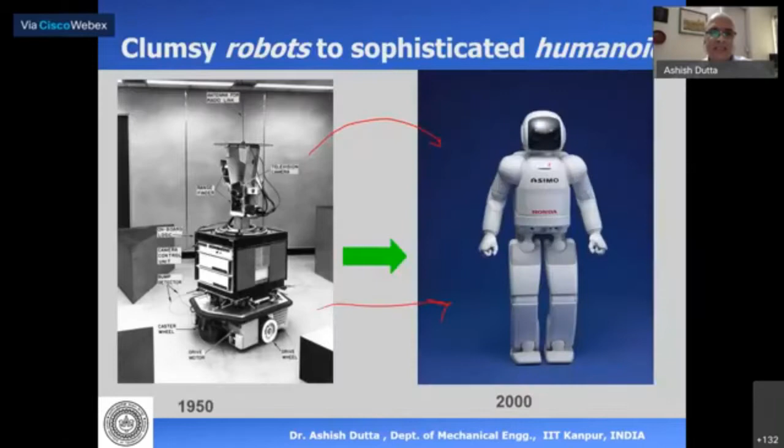As we go along, with the transistor, 1949 came about the microcontroller and the computer. The early computers were very big, probably the size of a room if not bigger. They consumed kilowatts of power and were made up of vacuum tubes, diodes, triodes and whatnot. So they were so expensive and so big that they could not be used widely.

But as we progressed after the invention of the transistor, things became smaller. The computer became smaller and more powerful. So in the earlier days, we had one computer controlling one machine - this is about the 1960s. In the 1970s, the computer becomes more powerful and we have one computer controlling many machines.

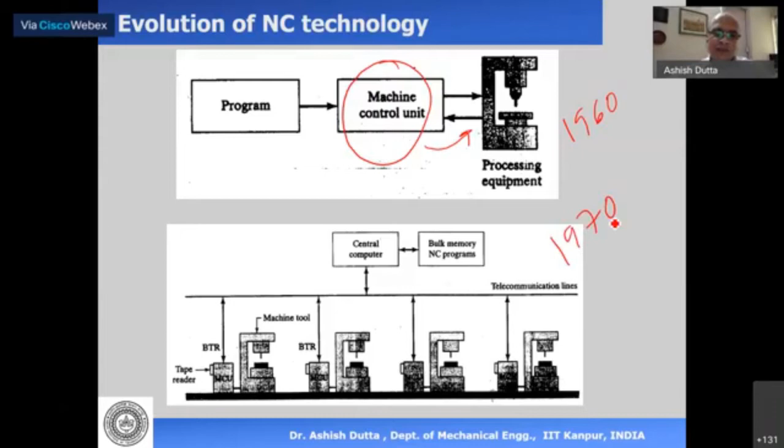Then we proceed further. The computer becomes so powerful that it can control all other aspects of manufacturing - for example material handling, storage - and this is what we call computer integrated manufacturing, which basically means the computer has become smaller and more powerful.

Today we know that the computer sitting inside your mobile phone is probably more powerful than the mainframe computers which were there in the 1960s. That is the way it has progressed. But what resulted in this progress? That is something I'm trying to point out.

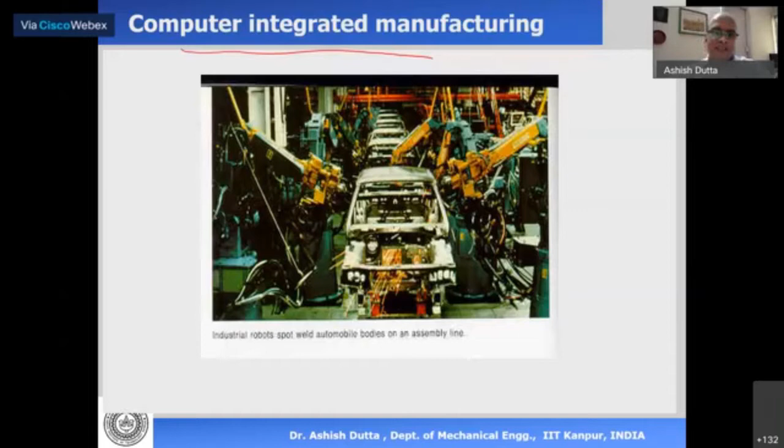So the second thing - before we go further, we talked about a robot. What is the definition of a robot? Now nobody seems to agree. That's interesting - why? Because all the companies want to call their device a robot.

In terms of students, if you ask a student what you're making, he'll say, I'm making a robot - why, it sounds nice. So people want to use the word robot freely for good impact, right from industries to students to academics to everywhere. That's why nobody seems to agree on what a robot actually is.

But it's generally agreed that to be called a robot, a device must do some or all of three things. The first is it should move around - if a mobile robot moves around, we can say this thing is a robot. By that definition, a vacuum cleaner today that can clean by itself is a robot.

Eureka Forbes sells vacuum cleaners which can clean your room by themselves - that is the definition of a robot. That is a robot. So that's the first point.

Second point is it should sense and manipulate the environment - it should have some kind of sensor input and output. We saw the mobile robot sense if there's an obstacle in front and take corrective action. So it can sense the environment and manipulate it.

This is the second thing it should be able to do. And the third thing it should be able to do is display some kind of intelligent behavior. So if a machine can do either of these three or all of them, you can call it a robot - that's what people agree today, that to be called a robot, a toy or machine should be able to do some or all of this.

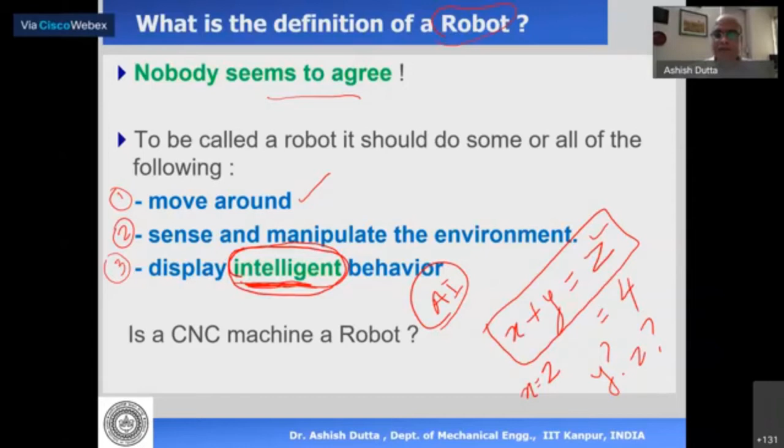So intelligence basically means the ability to deal with information that will require some kind of thinking. This is talking in English - what does it mean mathematically? That's not part of this lecture, but it has something to do with AI, maybe it can be discussed elsewhere. But this is important: if a machine can do any of these three things, we can say it is intelligent - it is a robot.

Based on this, we have had three generations of robots. The first generation has very simple pick and place. The second generation has external sensors, and the third generation are intelligent in some way.

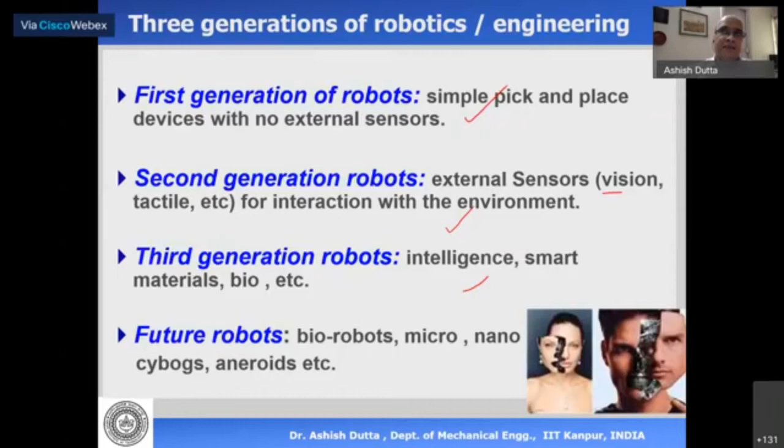Now the second major revolution came about in 1970, when electronics became faster, smaller, and cheaper. The computer, which was so big and expensive, suddenly became cheaper and smaller, and it has become so cheap today that it can sit inside your mobile phone. Why did this happen? The invention in electronics was VLSI.

VLSI is very large scale integrated circuits. Because of this, you could make the diode and triode into small electronic devices like transistors and chips, and put them in a motherboard. So if you look at your mobile phone, your computer, your laptop, it is essentially a board with small chips on it. What enabled that is VLSI, and once we had VLSI, electronics became smaller, faster, and cheaper, and our lives changed drastically.

The camera in a mobile phone is so small, so cheap, and so fast that it was not there maybe 20 or 30 years ago. And you can see it going faster and faster. Similarly, processors, displays - the essential technology is VLSI.

So robotics started off with the invention of the transistor. Then electronics became smaller, faster, cheaper in the 1970s. From the 1970s we had different subjects like vision, computer vision, speech recognition, artificial intelligence, and advanced controllers - microcontrollers, DSPs, FPGAs - which are used in mobile phones today. Essentially it came from here.

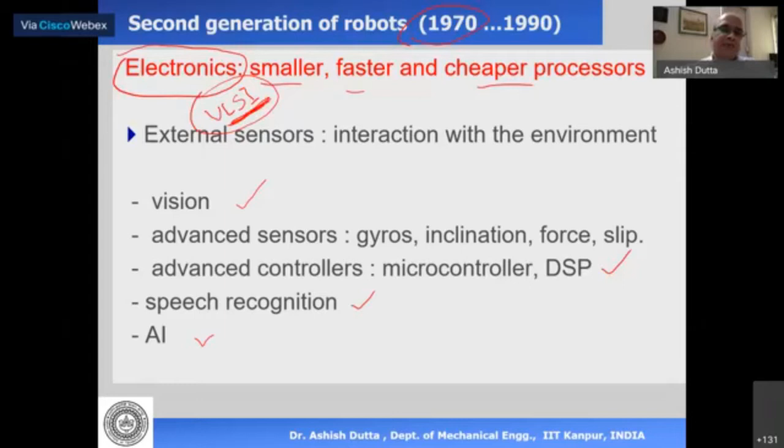Now, the third great invention that came about was new materials - smart materials, smart actuators, smart sensors. This is the third invention that came about, which we call the third generation.

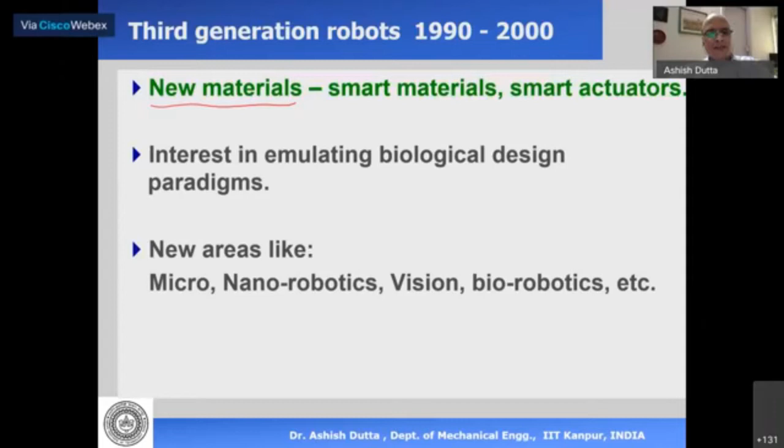So this is essentially to give you the history of where it came from and where it is going. Now robots can be of different types - they can be parallel robots, mobile robots, or stationary robots.

Now these are everywhere - you see them on TV. News will have something about a drone, some weapon used by a drone, mobile robots delivering something, pizza being delivered by a drone today. So this is a part of our lives.

Now, industrial robots, social robots - these are some ways by which robots are classified. What is the future? The future holds so many possibilities.

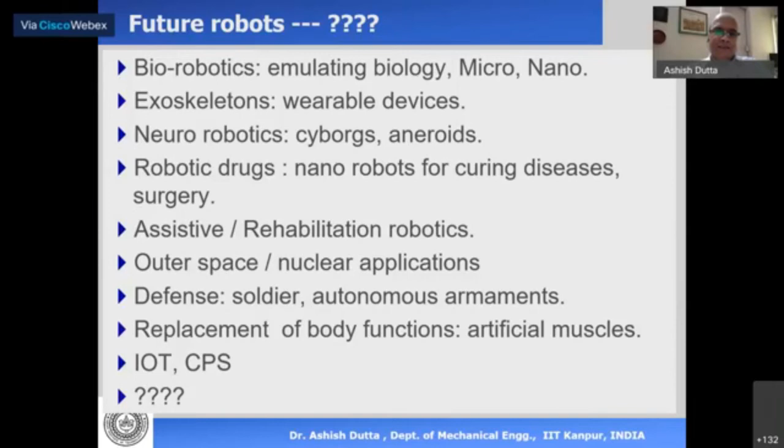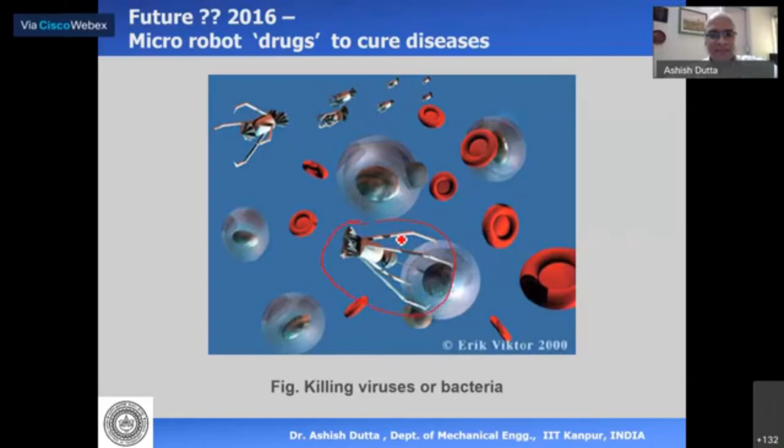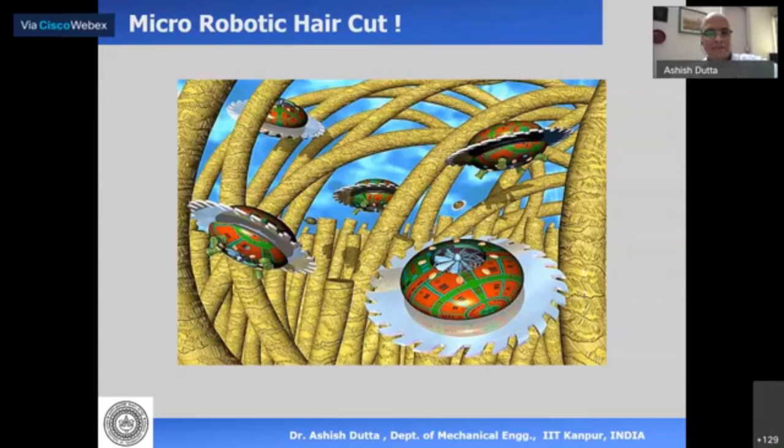Let's move on. This is for rehabilitation robotics, for people who have reduced muscular power or suffer from paralysis, or are disabled. Robots can be used to enhance their walking or carrying ability. Such robots are called exoskeletons, and they're already on the market for disabled people.

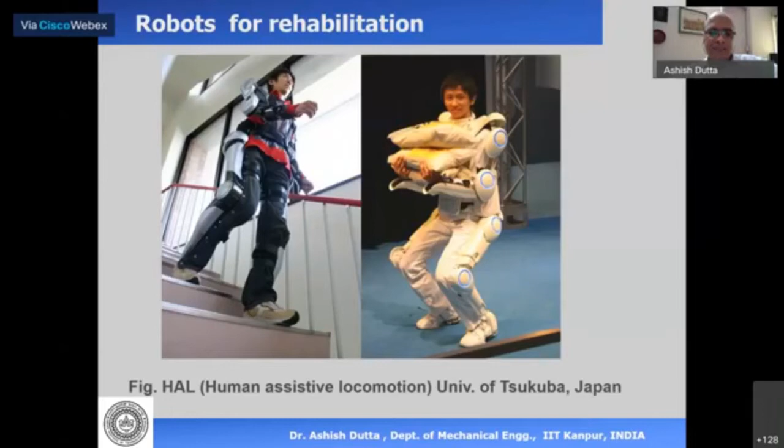Defense is a very big application of this. Soldiers need to carry a lot of weight, so defense is a big user of this technology.

Rehabilitation after stroke, I spoke about it some time back - these are basically robots for teaching how to walk. A person who has lost the ability to walk needs training, so the person is trained on this kind of robot. This is called the Lokomat. It is there in India also, in several cities they use this, although it's very expensive.

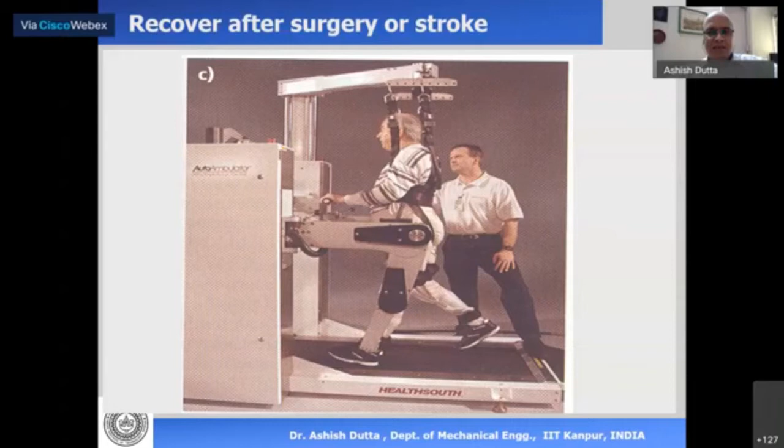Automatic transport is already there in so many countries. There are automatic buses which do not have drivers. They go and stop in some place, and people get up and get down. Although I doubt whether they'll work in Indian cities, they are there around the world.

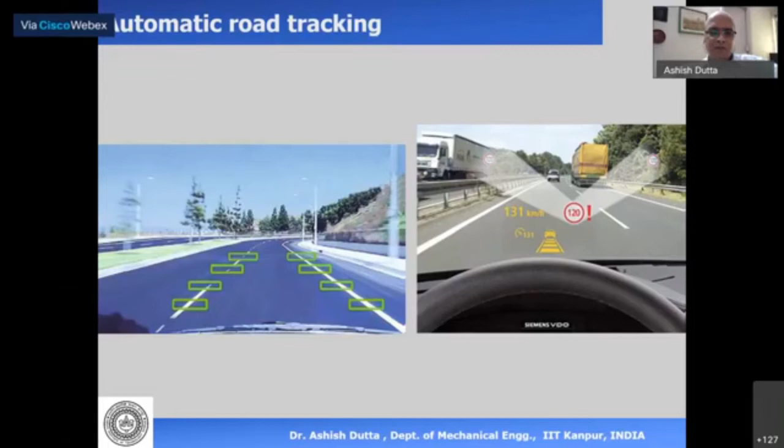Brain-computer interfaces again, this is something which is very much of interest now. One is automatic drivers, then driver tracking - a lot of car companies are already doing this, where if the driver is sleepy or looking at the mobile phone, it can give an alarm. So face tracking, road tracking, then rehabilitation robots which are interacting with humans.

Now coming to education, we said that robotics has become very cheap, because of which it has proliferated right down to the school level. Now there are different robotic platforms available, and what I want to give you an introduction to is that it's very, very simple, and it enhances a lot of other subjects. It is not only for technical people and people in sciences, it is for everybody. So one of them are mobile robotic platforms.

The other is serial arms, robotic arms. Now, how do these robots actually work? If you think a little bit, how do you drive a car? When you drive, you look at the road, you want to follow the line on the road or keep to the left. Basically, you look outside, you hold the steering wheel, you turn left or right, and the car goes forward. That is how you drive a car, and basically we call that a closed-loop control system.

A basic control system essentially consists of the driver, which is you. There is a steering in front, and there is some feedback. Where is this feedback coming from? When you're looking outside with your eyes and rotating the steering, the automobile is moving, and there is feedback - this feedback is vision. So we are looking with our eyes, seeing where the road is, and tracking it. These are four parts which are basically involved in any robotic system.

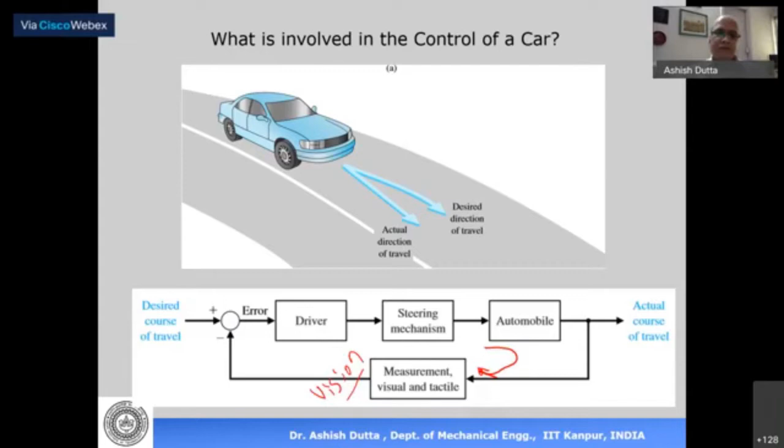This is an example of an educational robotic system, a mobile robot which has sensors in front, and it can perform particular tasks. It basically consists of an actuator, a DC motor which is going to move. Then we have a sensor, which is going to sense something. Then we have power, which is a battery - you need to give it power. There's a controller module. So essentially we have a DC motor, a battery giving power, a controller, and we can have a sensor. We need not have a sensor, but we can have one. These four things make up the robot.

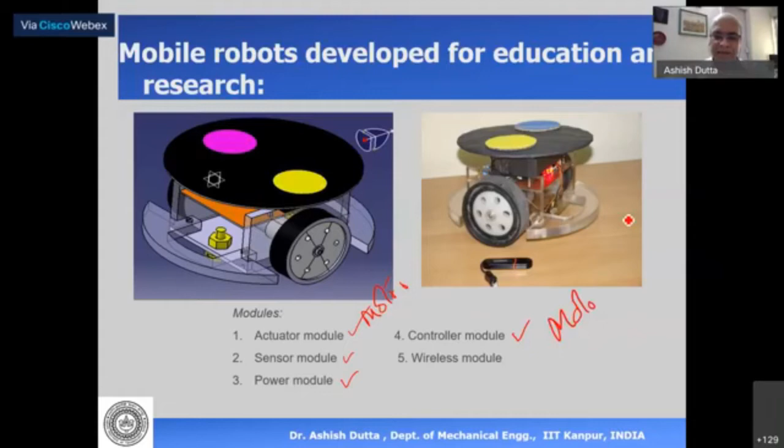So number one is a motor - we have a motor here. Then we have a controller, which is here. Then we have a battery, which is here, and some kind of sensor, so there can be a sensor somewhere here, at the bottom. By controlling and adding these things, we can make a robot.

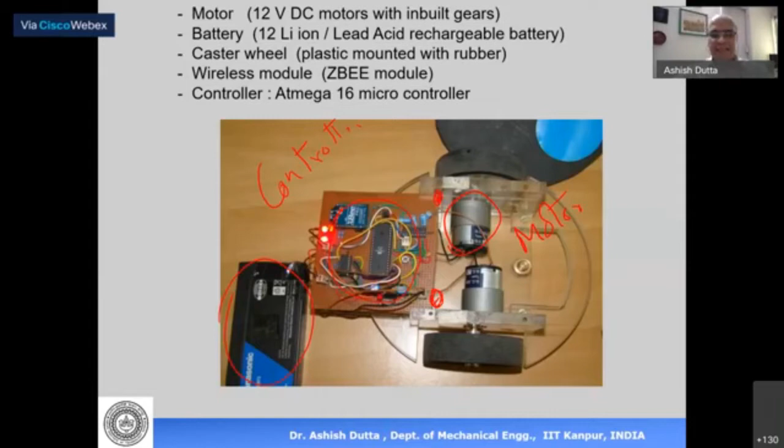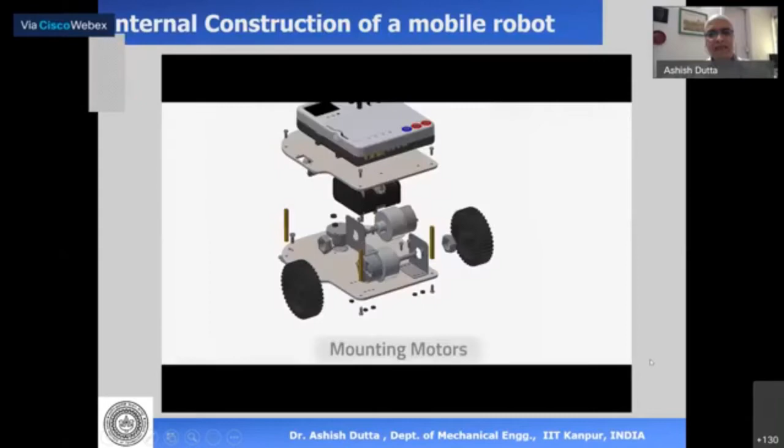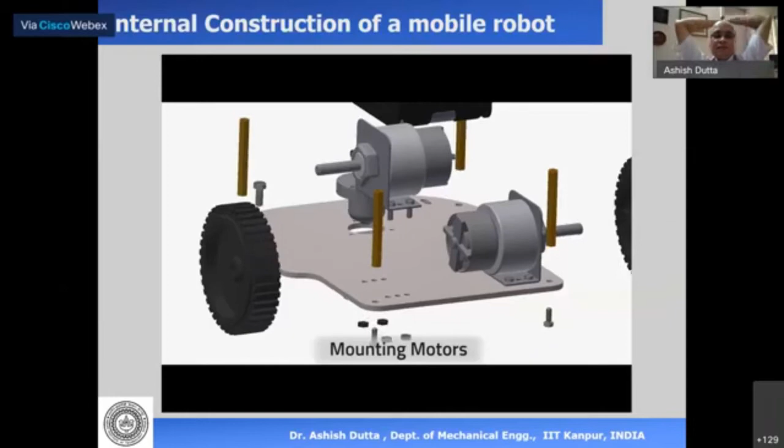Now, how easy is it to make it? This video actually explains how easy it is. So these are the different parts - you just connect the motors, and to the motors we can connect the wheels. So the two motors drive the two wheels, and the wheels are connected to the motors.

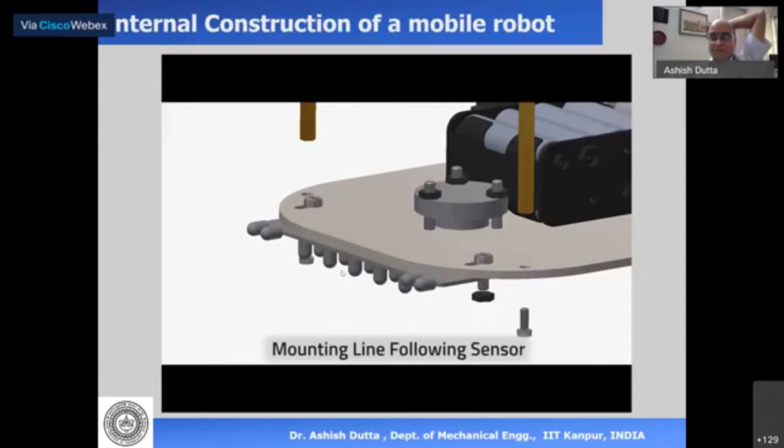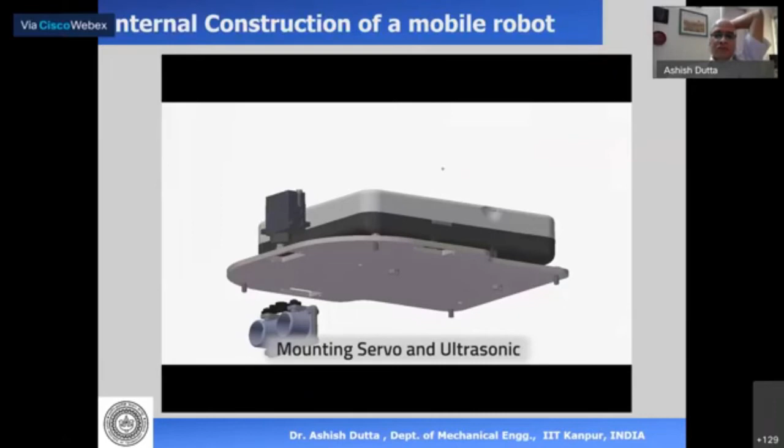Then there is a battery. There are sensors - in this case, ultrasonic sensors in the front, and IR infrared sensors at the bottom to, for example, follow the line. This one here is an ultrasonic sensor, and there is a controller on top - so this is the controller. So there are 4 units. You put them together, and this is your robot.

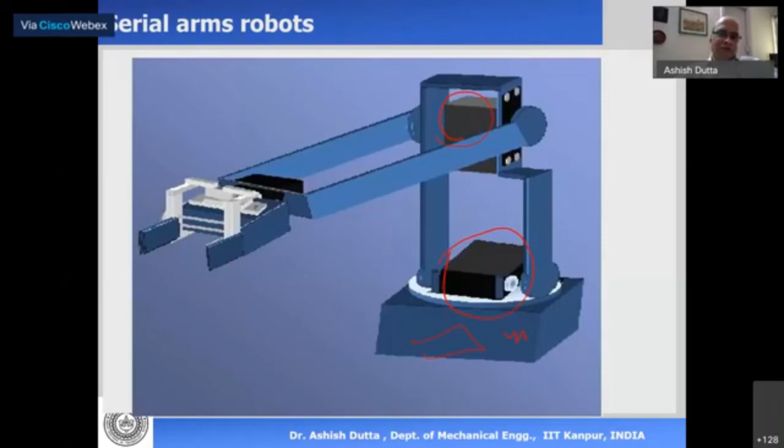So you can very well see how easy it is to make a mobile robot and to make a serial arm robot, okay, for students. These are not industrial, these are just for teaching. But this, because first of all, the controller has become very, very cheap.

Now, if you're wondering where you've used it indirectly, most washing machines and microwaves all have controllers, and a lot of them are these Atmega controllers. So sitting everywhere in your house also, you don't know they're there. In cars, the automatic backing sensors are ultrasonic sensors - so the sensor is there. Automatic transmission, automatic fuel injection is done by an electronic system today, which is again controlled by a microcontroller. So this is sitting in your car also. It is there everywhere.

We don't see it. Now, this is essentially the microcontroller, and this microcontroller can be used very, very simply to control a DC motor or to take sensor input output. It is so simple that you'll be surprised it can be done so simply.

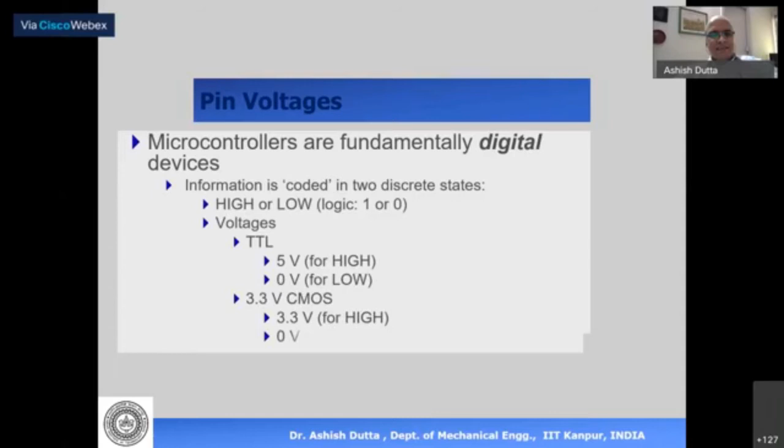That's it. Now, how do you write it in terms of a program? How we write it is basically - this is the basic command line, okay, nothing to get scared about. So it's the pin mode, pin number, and pin mode - this is actually the syntax for the program line. The pin mode says you have to set the pin to either input or output, so the pin can do either. So you have to first tell what is the pin number and what is the mode - is it input or output?

Okay, then you can do a digital read if you're reading something from a pin. It is very logical - first you tell the microcontroller that the pin is an output pin or an input pin. Second, after you have said that, if it's a read pin, that means you're reading sensory information from the sensor, then you can read it as a read pin. It is going to read pin number.

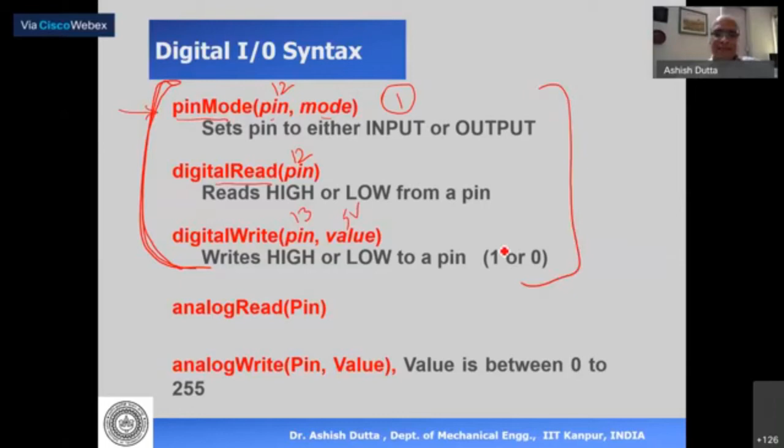Suppose pin number was 12 here. We can write pin number 12, and it says it will read whatever signal is coming on pin number 12. Digital write: if you're sending a voltage out, you simply say it's a digital write, and what value, so 5 volts goes out on pin number 13. So just these three commands are enough to drive a robot. You'll be surprised how easy it is. Just these three are enough for a very, very simple kind of robot programming.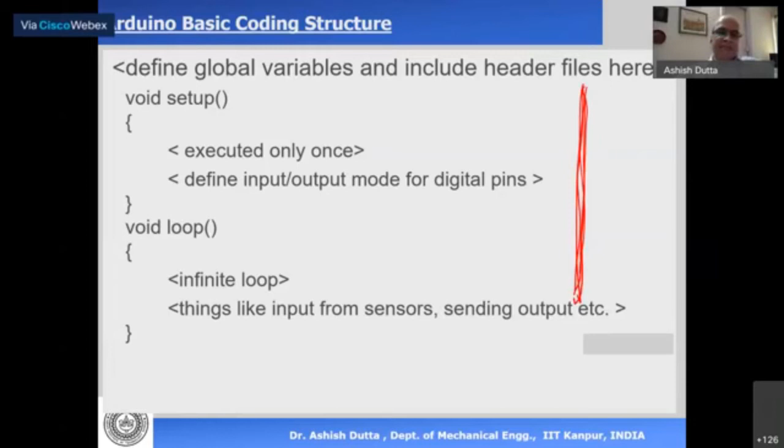Now there are other files which run the microcontroller itself. Those program lines are actually available in open source, and this is the same everywhere for the microcontroller. So you just have to copy it and paste it.

So if you want to blink a light, for example, there is an LED, which is this one. It's not a white light, it's a red light. Like the Diwali lights that keep blinking, that's another example, a very small chip controlling your Diwali light which is blinking. So that's a chip, something we have in our houses. So if you want to blink this light, what is the program associated with it? It's just these few lines.

First of all, you set the pin mode to 13. So the pin mode for this 13, it's an output pin because you want to send a voltage out to put on the light. So it's pin mode 13, output, is an output pin. So we are setting up the pin.

Next, this is the one that is actually blinking the light. Digital write LED built in, number 13, high means it's making it 5 volts, it's giving a voltage high. Then it's giving a delay of 1000 milliseconds, which means after giving the voltage, you wait for 1000 milliseconds, which is about 1 second. And then you do digital write, you make it low. So first we are making it high, the light is coming on, then we make it low, which is 0 volts, the light is going off.

Again you wait for 1 second. So basically this is a very simple example which shows how easy it is to program a microcontroller. There is nothing to be scared about, there is no great technology involved that you have to learn and take courses to do this. Once you know these 3 lines and know what it's doing, it's so simple.

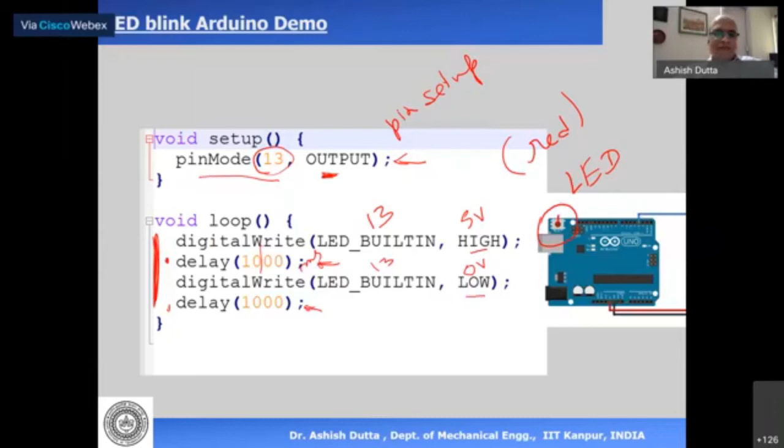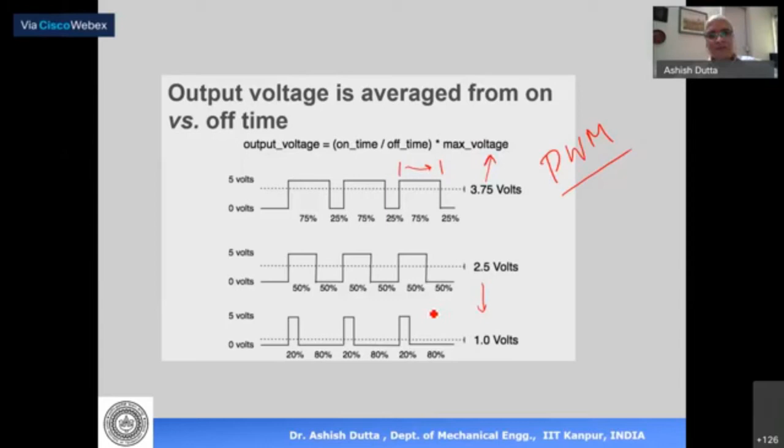Now we can drive motors. Motor driving is a little bit more tricky because we have to make the signal high and low using what we call pulse width modulation. There's a channel number, and all you have to do is control the pulse width in that channel number to control the position of the motor, or the voltage going to the motor. So if you want to run the motor faster, you increase the pulse width, the voltage goes up, and the motor runs faster. If you want to decrease the speed, you decrease the pulse width, and the speed comes down. So this is again something so simple, to drive a DC motor using a microcontroller.

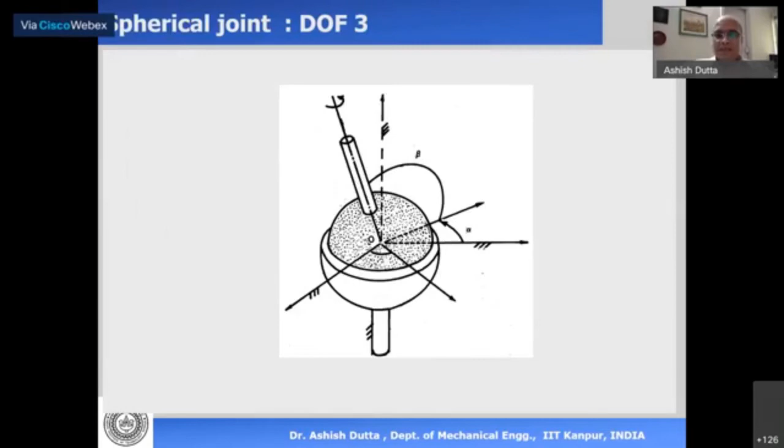Now we have seen that robotics is there everywhere, movies, cars, education. There are a lot of robotics in movies, cars. Now it's very important to understand what are the other areas that are going to impact our lives in the near future, if not today.

Number one is cars. There are already a lot of sensors, controllers in cars. Driverless cars are coming. They have come in several countries overseas, and at some point in the future in India it is going to come. So when we say you should prepare students for the future, this is the meaning: if they know what is sensor, actuator, controller, these are essentially 3 elements which are connected together in whatever application you talk about, whether it's a car or a washing machine. There is an actuator somewhere, there is a sensor somewhere, and there is a controller somewhere. It's just a connection between these 3.

So if you know sensors, actuators, controllers, it's just a question of the application. A smart home today is one in which the light can come on or go off. We have street lights which come on automatically when the sunlight goes down. Exactly the same: sensors, actuators, controllers.

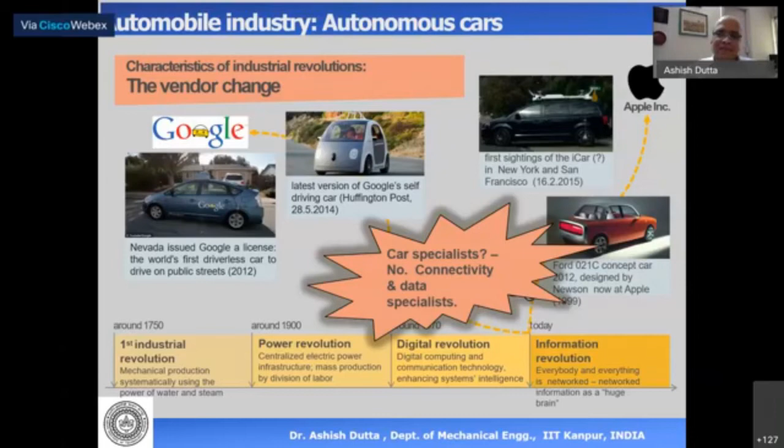Now in terms of education, something very important today is that education is slowly becoming interdisciplinary. It is not possible to say that I am specialized only in a particular area. This is true of engineering, it is true of teachers, it is true of different subjects. You should know other subjects also. So on one side we are specialized, on the other side we are actually interdisciplinary. That's a very funny kind of a situation.

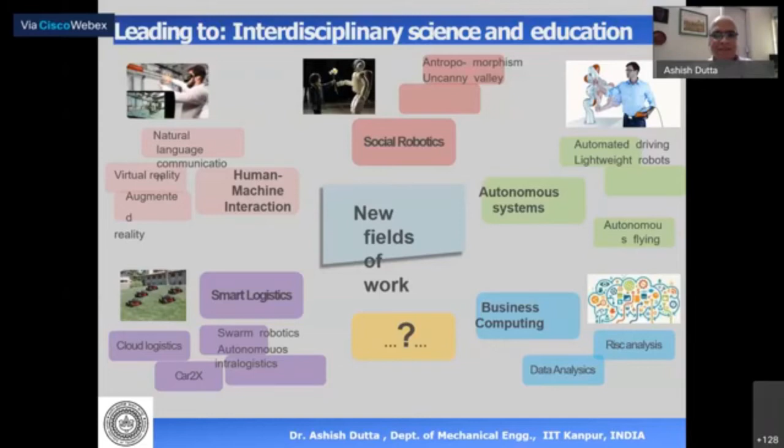So if you look at the speed at which products and technology are coming, the speed is just too fast. Even for technical people it's too much. So it's a good idea to be exposed to the basics of this. That's what we meant by preparing students for the future.

Now these are all examples which did not exist 10 or 15 years ago: iPhone, iPad, Kindle, 4G, we have 5G now, Uber, Ola cabs, Airbnb, Android. These were not there; these are there today. And the basics of them are the same: sensors, actuators, controllers, programming.

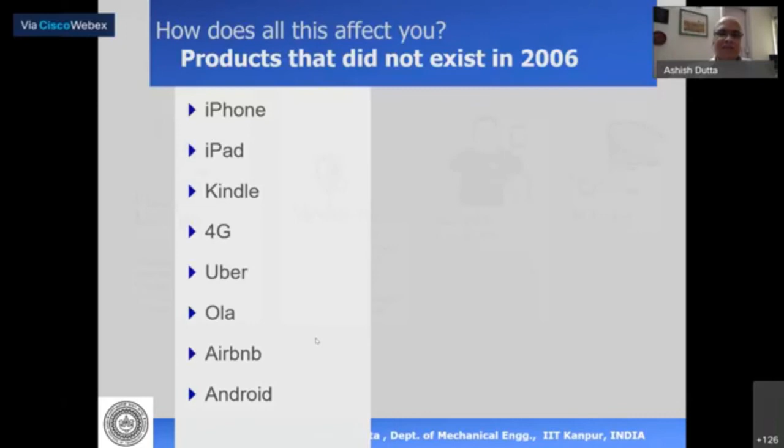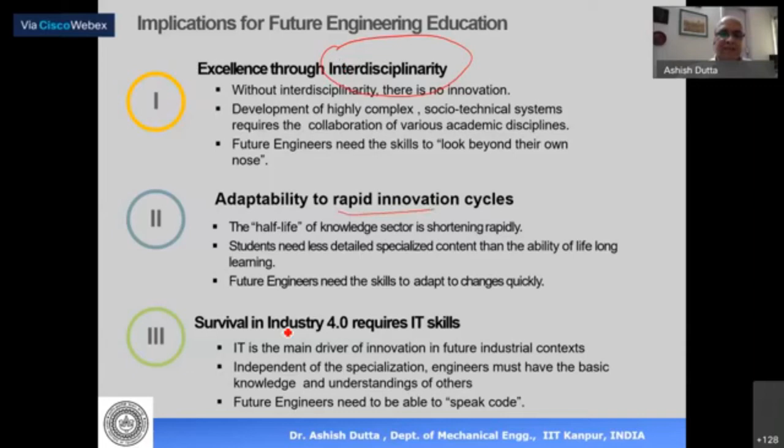Now the impact on education, although this is more focused towards engineering education: number one is excellence through interdisciplinarity, then adaptability to rapid innovation cycles, survival in Industry 4.0, then a new business thinking, taking risks, dealing with uncertainty, wrestling with creativity.

But the question that comes up is, how do you teach all this? We know these things are required. Students need entrepreneurship skills, technical skills, managerial skills. But how do you teach all this? How do you make a person creative? Can you read a textbook and become creative? How do you teach innovation? These are questions being asked today, because we feel that if you want to survive in the future, we need to have these skills.

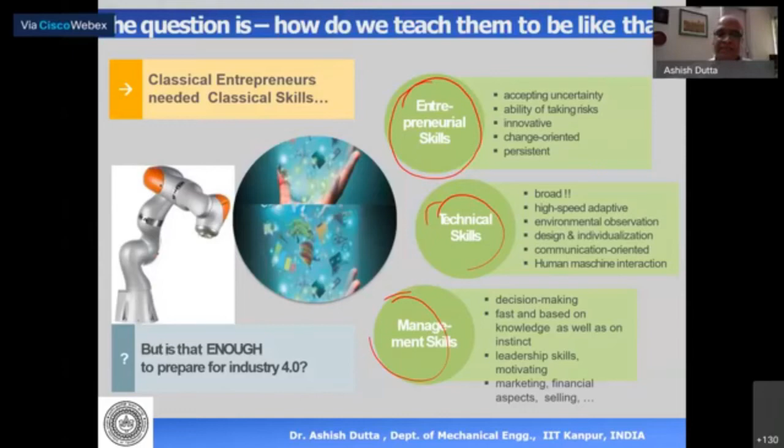In terms of teaching itself, a new kind of teaching is coming. Well, not coming, it has already come. I'm speaking to you over the net. Maybe last year, if this workshop was held, I would have come personally and spoken, but now I can't come personally. Everything is online, so we are talking to our students online. So what we call massive online courses are already there. Education is changing, and we need to change.

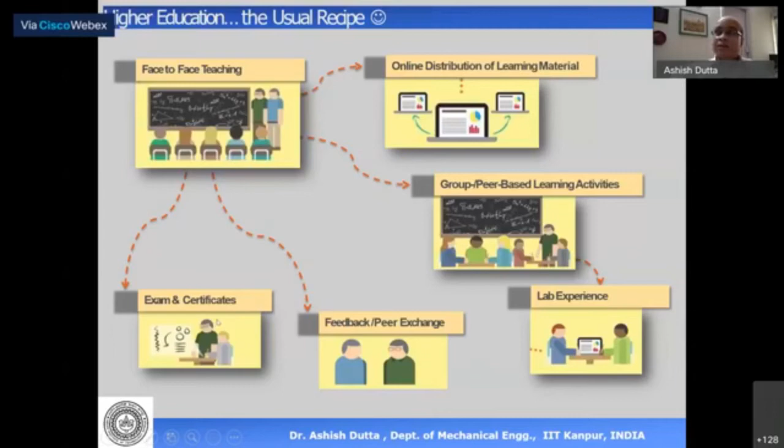Now this is supposed to be the way education was: you have face-to-face teaching, online distribution of material, exams and certificates, a lab experience, and then you get exam certificates. This is the way courses were run, this is the way education was. This is the new kind of education: face-to-face teaching is not there anymore, but face-to-face over the internet.

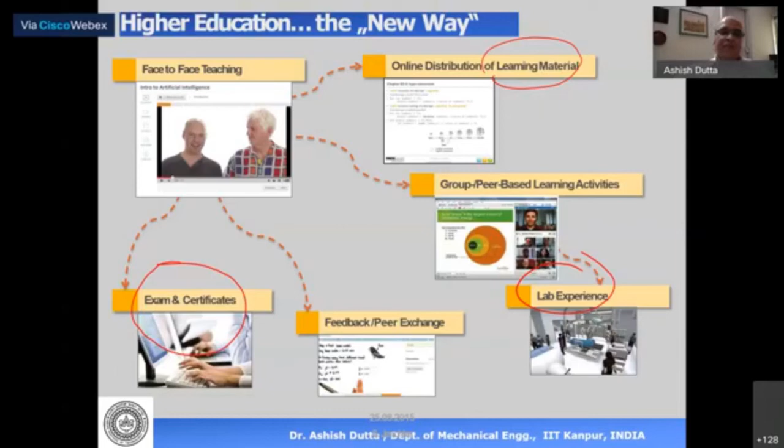The distribution of learning material is again over the internet. Labs are over the internet, so the student is sitting at home. Exam certification is again over the internet. So this is the new kind of education we are in. Learning about programming, software, sensors, actuators, controllers, robotics would actually help, because a lot of this is involved in this.

I think I've run out of time, so I'll just wrap this up. Regarding teaching, the way teaching is going, this question is becoming relevant: can robots teach? Can we have an online lecture or an online course being conducted by a robot itself?

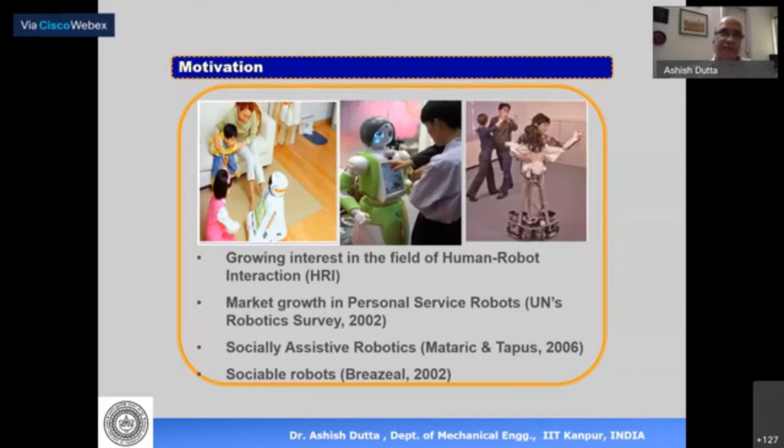Physical robots are already there. In many countries, they do not have teachers. In India also, I have been approached by a lot of companies where in village schools, they don't actually have teachers in remote villages. In village schools, it's difficult to teach English, there aren't people who can speak English properly as teachers. So can we have a robot which can actually teach? This question is relevant even for India today.

So these are robots which have been designed essentially for teaching, sometimes languages. There are dance teachers, it can teach dance. Robots just for interacting with kids in schools. This is the next generation of teaching, and this is robots in some way. We have already social robotics.

We have chatbots where you can chat with a robot online. Sometimes you cannot make out whether, for example in railway reservation or airline reservation, very often the help that comes there—when you send them a query or contact them, you get an answer. Now, is that answer coming from a human or from a machine? You can't make that out. It's difficult. So that is also a type of robot.

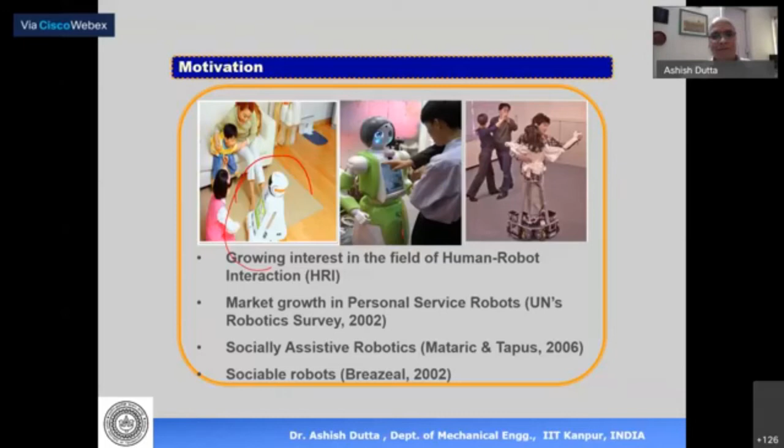So preparing students for the next generation would actually help. And before we train the students for the next generation, we ourselves should be familiar with what is going on. What I basically wanted to show is that it's not very difficult. This is a study which was done.

What about this—would it be possible for you to learn from robots? And if it's possible, what would you like to learn? If you look at the answers, they're interesting. The lower kids said that robots are like magicians. The elder fellows said they're like machines or tools. People felt that robots should have human-like appearance, not machine-like appearance.

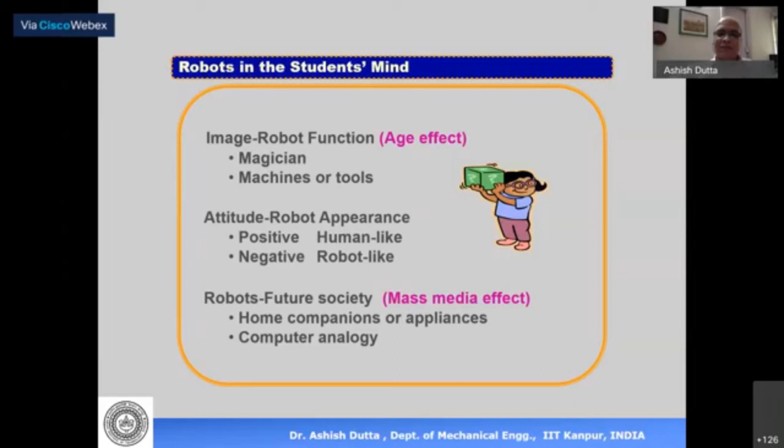Then what would you like the robot to do? For example, they could be home companions or appliances. These are some areas—what should the robot be capable of doing? It should be capable of tutoring humans in general. They could be home tutors, learning assistive robots, in areas like computer programming, maths, science, curriculum, memorizing languages, etc.

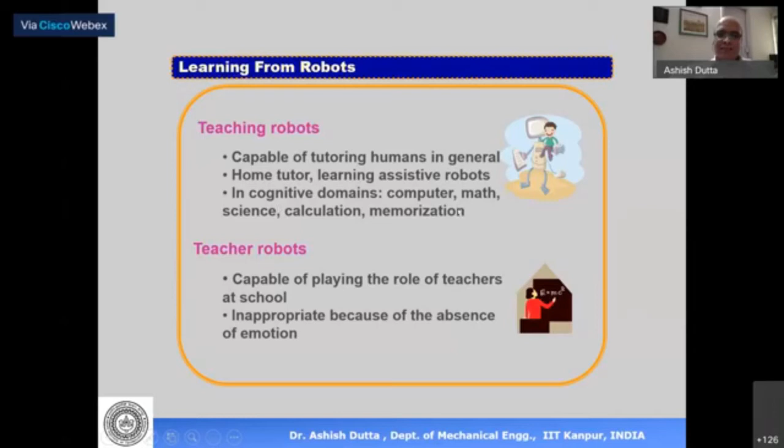So this question is very, very strange—that in future we could be having robots which are teaching. Not in future, they're already there, but in a much larger scale. So would you like to learn from a robot? Please think about it.

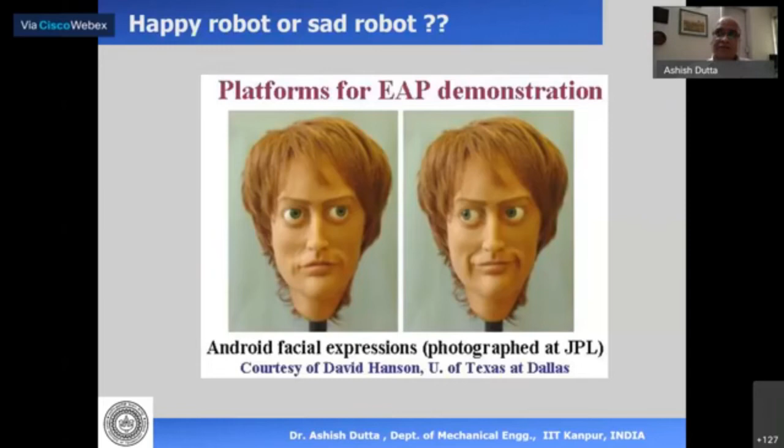Historically, these automatic dolls were made, I think, in Japan only, which could perform particular tasks. For example, they could draw pictures and write simple things. And in Japan, they made this tea serving doll. It was a doll which could serve tea.

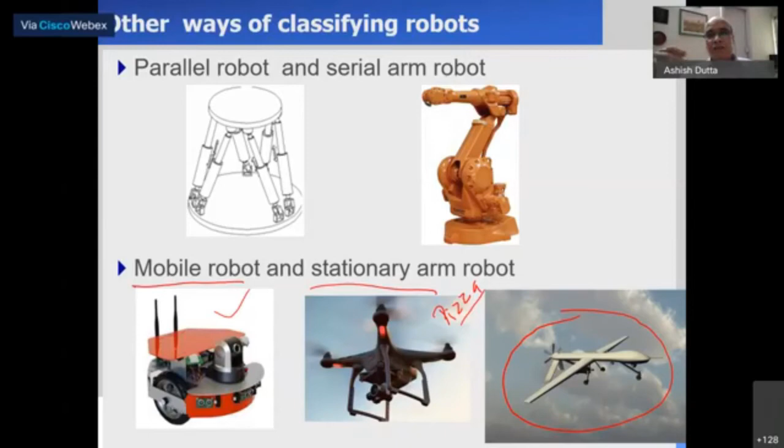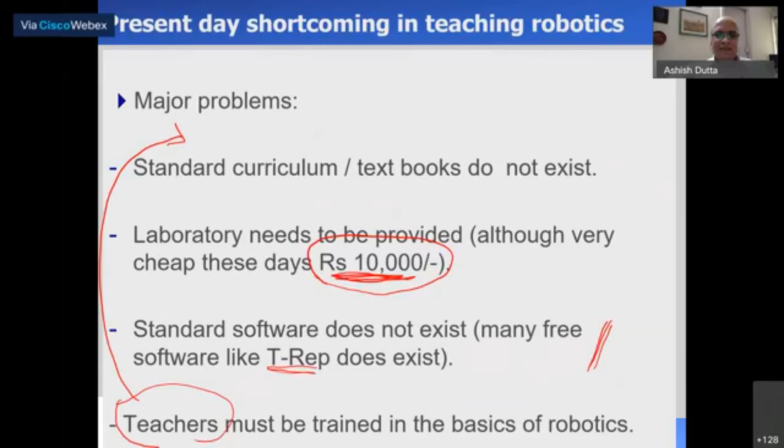You take the teacup and put it on the doll, and it will take it somewhere and serve the tea. But these are mechanical devices. How would you power it? There is no controller there. The year is somewhere around 1780, so there is no electronics or control there. So how is the power coming? There's no battery. The power was basically by springs.

Like the older watches, they would wind it up, and this doll could go to some places and do a particular task. There is a robot museum - maybe you can have a look at the robot museum in Nagoya City in Japan. These dolls are there. They actually go and do particular tasks, but they are mechanical devices, no controllers, no programming.

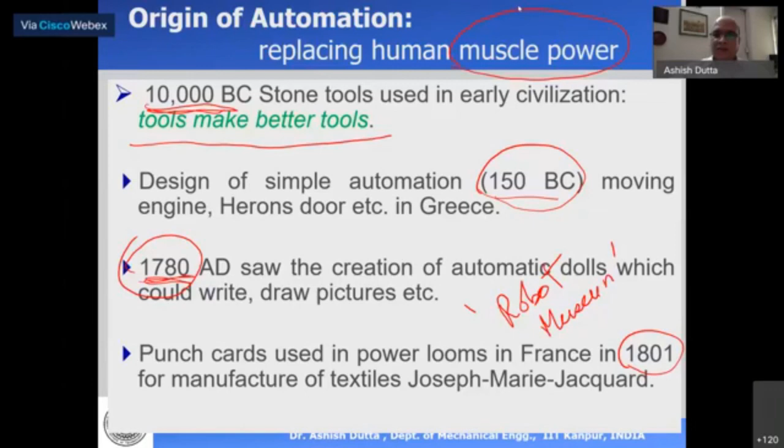Hello sir, sir I just wanted to ask where should we write that code? So that is normally - I did not go very much into detail today. So just give me a minute, I'll scroll down to that spot.

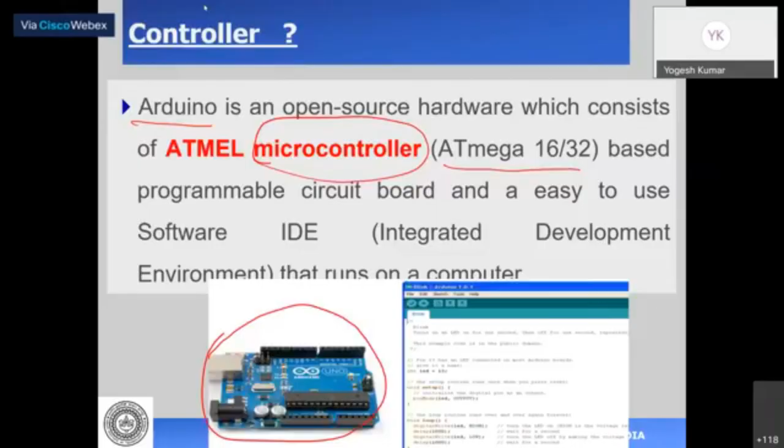Dr. Ashish Dutta, Professor, Mechanical Engineering Department, IIT Kanpur, told us about the introduction of robotics. Robotics are very much a part of our daily life. He told about the advantages of robotics, the life of Amazon robotics, how a robot works as a machine, or you can say intelligent machines. There are various types of kits which are used in robotics and social robots. He told us about the gender of robots, whether a robot is male, female, or neutral. He told about artificial intelligence, and about the work of robots, preparedness, teamwork, fun, learning and making.